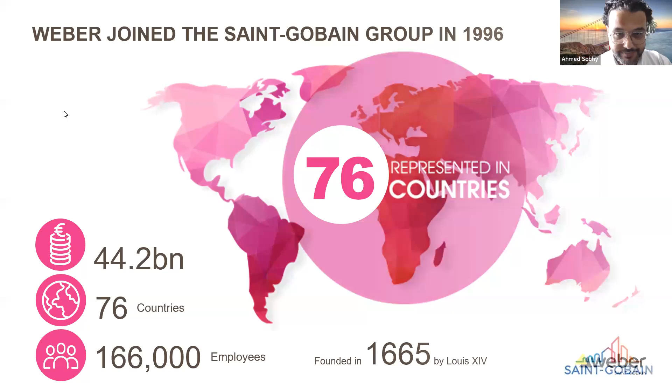I'm thinking that also Saint-Gobain operates in South Africa, but I'm not quite sure. Our core range is specific to the UK and Ireland market. My apologies, this presentation is tailored towards the market in the UK and Ireland. Obviously, the technology, the information, the knowledge is quite common, so it can be transferred from here to South Africa, definitely, but the market information is quite targeted towards the UK.

We serve the market here in the UK and Ireland through 5 main pillars that you see in front of you. Our biggest pillar at the minute, our core range of products, is external wall insulation and renders, which obviously forms a huge part of our business. We also have a flooring range, so obviously talking about your screeds, your self-leveling or self-smoothing compounds. We also have a tile fixing range, and lastly, my part of the business is the technical mortars.

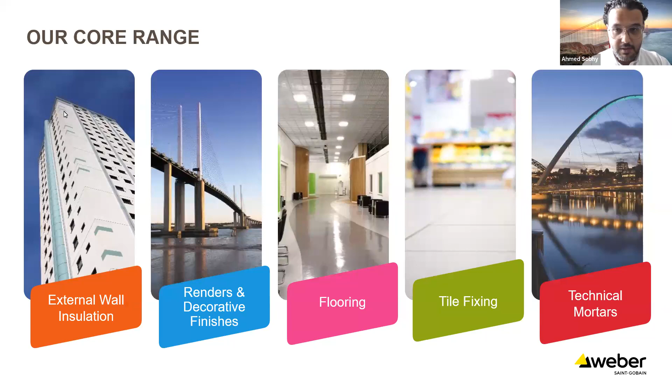Again, quite relevant to the people who have relevance in the UK market or who operate in the UK market. We've got 3 plants across the UK and Ireland. Our head office and main plant is based in Flitwick, Bedfordshire. We've got another plant in Telford and the 3rd plant in Northern Ireland in Ballyclare. We try as much as we can to source our material locally.

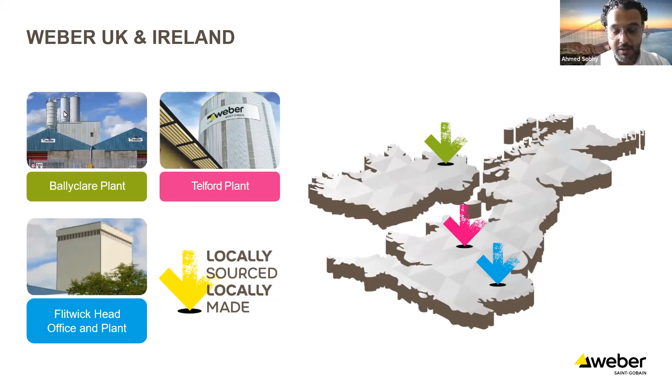As a part of Saint-Gobain, we've obviously got sustainability at heart of any business that we do, and we've got our net zero targets. With these 3 locations centrally located within the UK and Ireland, we have better control on our supply chain, which forms a huge contribution into the carbon emissions that we make. Also, from a supply chain perspective, we try as much as we can to locally source our raw material and our products in order to minimize the carbon emissions related to raw materials and production.

When we talk about the market and the technical mortar market, we use the terms infrastructure and technical mortars in a synonymous way, because at Weber in the UK we highly focus on the infrastructure sector of construction, and we serve this market through 4 main pillars of product portfolios.

The first of them being concrete repair, obviously a huge range of products that has a dedicated CPD towards it on its own. But as you can see from the picture here, a big part of it is the spray concrete with its massive and different applications, whether for slope stabilization, impressed current systems, or also repairing big cracks.

We also specialize in precision grouting. A big range of our products is targeted towards precision grouting, whether that is in an infrastructure context or a bridge context in terms of bridge bearings and plinths, but also from an industrial context when we're talking about machine base plates.

Thirdly, highway mortars forms a big part of our business as well. So we're talking about patch repairs, obviously for different thicknesses and different bay areas, quite fast-setting materials that serve the highways. Also, the bedding mortars that serve the furniture of the highways.

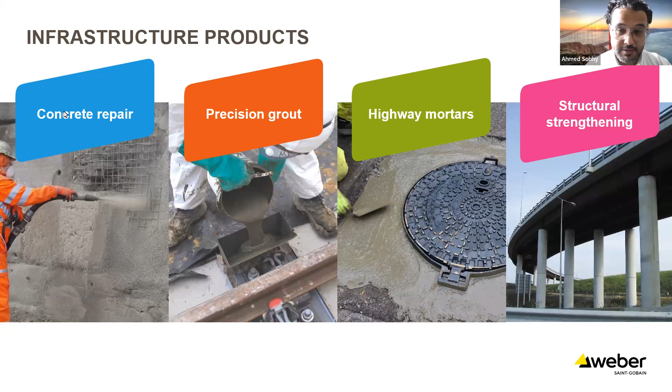And lastly, our topic for the day and a huge area of personal interest of mine is the structural strengthening using fiber reinforced polymers. Moving on to the introduction about the epoxy resins and the different fiber types. As we talk about, for instance, reinforced concrete, we're talking about a composite section where concrete and steel come together for obvious reasons that we all know about.

In a similar way, when we talk about fiber reinforced polymer, we're talking about a composite material that is made of a polymer matrix in addition to fibers. The fibers at the minute can be a myriad of materials. Obviously, glass, carbon, and Aramid or Kevlar as they call it, are quite common materials. But as we explore more, as we research more, and as we focus more on sustainability, a lot of material comes to the front, one of which is basalt, which is a material that is highly researched at the minute.

Yeah, thank you. Thank you.

As we address sustainability issues more and more, a lot of material, a lot of fiber types come to the front, and lastly basalt, which is obviously a material that is currently being researched and studied for use as fiber in structural strengthening.

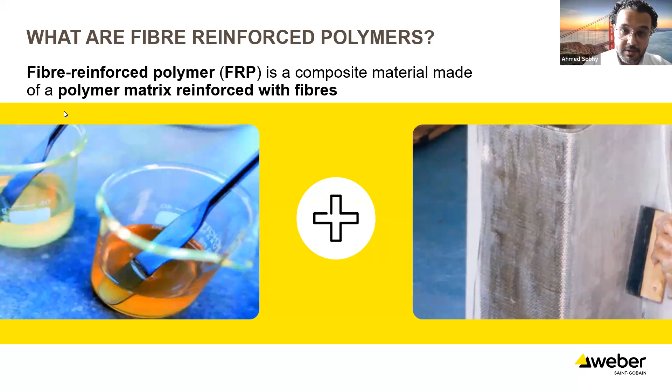We're quite aware that epoxy resins, or epoxy in general, is a petroleum derivative, and as a company and as an industry, we should be very much aware about the carbon emissions and the downfalls of using petroleum derivatives in fiber reinforced polymers or construction in general. We're very much aware about this.

When we're talking about a laminate or a finished product of fiber reinforced polymer, we're talking about a resin to fiber ratio of about 30% resin to 60-70% fiber. With that low proportion of resin within the plate or finished laminate, it has the highest contribution of carbon emissions when we talk about life cycle analysis over the life cycle of the product.

This 30% of resin contributes about 80% of the carbon emissions of that product over its life. So obviously it's a huge contribution when we're talking about carbon emissions, and we're quite aware about this as a business, and we're always investing into finding alternatives to epoxy.

But I think you guys would agree with me that adopting new technologies within the construction industry is not the easiest. There are lots of obstacles and hurdles to go through in order for this to find its route to market. But the most important point is that we're aware of this, and we're doing our best to change that moving forward.

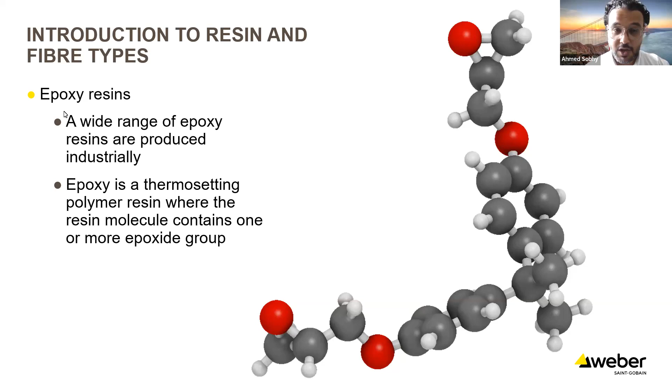When we're talking about the resin, fiber reinforced polymers as a material in general are not exclusive to the construction industry. It has been present before the construction industry and has been used in several other industries, and the main two reasons it's been used in different industries are, number one, it's lightweight, and number two, its ability to take a massive amount of load.

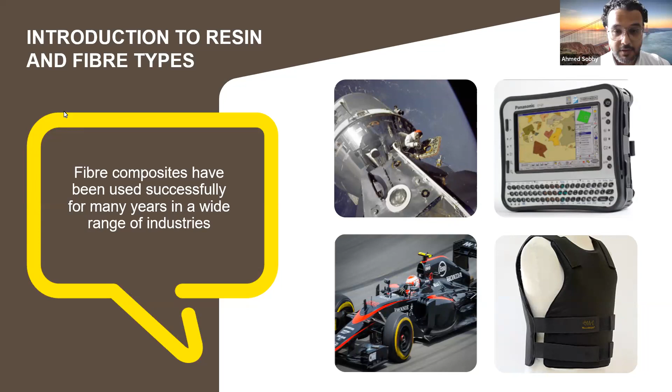As you can see from the pictures here, it has been used in the manufacture of spaceships and space shuttles, also in racing cars, but also from an army and military point of view, it has been used heavily, especially Kevlar, to produce bulletproof vests.

Also strengthening the point of the resin properties, and why it is of huge importance that we give significant importance to what material, what resin type we actually specify. The reason why this is of importance is that when we're talking about fiber reinforced polymers used for structural strengthening generally, we're talking about loads and structural elements being transferred to the fibers through the resin.

So obviously we're talking about a load-bearing element that needs to have minimum viable mechanical properties in order for it to transfer the loads from the structural element to the fibers.

That's number one. Number two, when we talk about the most common means of failure, especially right after the application of fiber reinforced polymers, it's usually due to delamination. Obviously, delamination could be due to several reasons.

One of them is poor application of the material, but also from research and from various experiences, poor mechanical properties of resins that have been used could play a major factor in delamination of fiber reinforced polymers after application. This is why it's very important for us to give huge significance to the resin type and the properties of the resin that we produce.

The resin that you can see in front of you is in full accordance with part 4 of BS EN 1504, which is related to structural bonding. Obviously, BS EN 1504 is a harmonized standard.

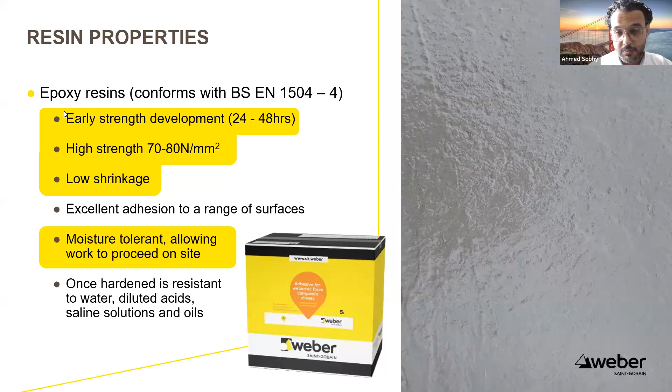We're talking about the moisture content within the concrete, but in a country like the UK, and I'm supposing tropical weather in South Africa as well, if we've got dampness on the surface of the concrete, this is absolutely fine also to apply Weber structural adhesive on top of it, because it's a moisture tolerant material.

When we compare that from a general perspective with cement-based concretes, cement, as we all know, needs about 28 days to gain strength, unless certain special admixtures have been used. We're talking about lower strength gains, around 30 to 60 megapascals over the period of 28 days, and the need, obviously, for formwork, which goes hand in hand with using cement-based concretes.

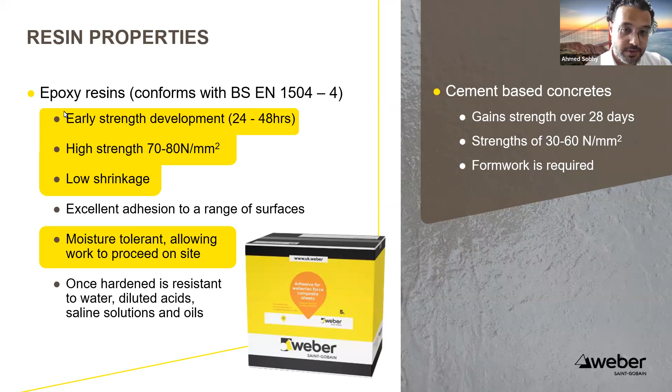Moving on to the different fiber types within our range: we've got the glass fiber that comes in sheets, the carbon fiber that comes in both forms as plates and sheets, and lastly we have the Aramid fiber sheets.

This picture you see here for the Aramid fiber sheets was applied on the M6. This is a project that happened on the M6 here in the UK. If it's irrelevant to you guys, my apologies, but you'll get the gist of it. Literally, a military tank was passing by, and this wasn't the first incident.

This column on the road on the M6 was actually quite susceptible to lots of impact from cars. The reason that caused the application of the Aramid fiber on this column was a military tank that hit the column, causing severe deterioration. In this application, it wasn't structural strengthening, rather it was concrete protection and impact resistance of the concrete column.

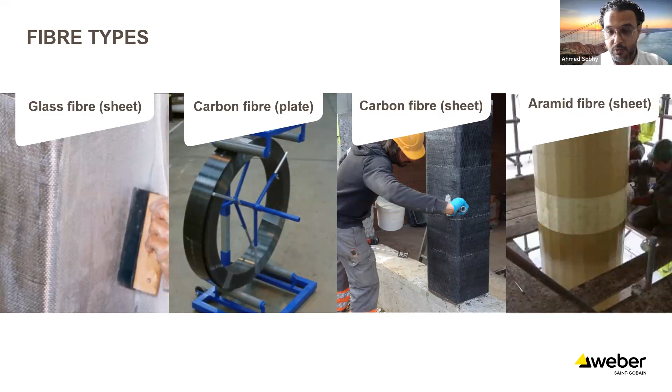So this is the range that we have at the minute. Obviously, the specification of which material can be used in which application depends on many criteria, and we'll try to summarize this in the next slides.

Talking about the different mechanical properties, we'll single out a few of the product portfolio you've seen in the previous slide. Starting with the carbon fiber, the picture here shows column strengthening and axial reinforcement for a column to increase its load capacity. For mechanical properties, we're talking about a sheet weight of around 200 to 400 grams per square meter, a very low weight compared to our regular day-to-day construction materials.

We're talking about a tensile strength of about 2,600 to 4,400 megapascals. It's important to note that these values for tensile strength are basically for the fibers, not for the finished product. So when the fiber is combined with the resin, these numbers actually reduce dramatically.

Even when we consider the tensile strength of the finished product, the laminate or the wrapping, we don't take the whole amount of the tensile strength in our design and consideration. We take only a proportion of that, and the most governing criteria will be the strains rather than the stresses, because this material plays a part within an ecosystem of concrete, and the concrete within the system is the weakest component. So we can't design according to 1,000 or 1,500 megapascals; we only take a portion of it. Otherwise, the concrete will completely crush, or the system we design will delaminate.

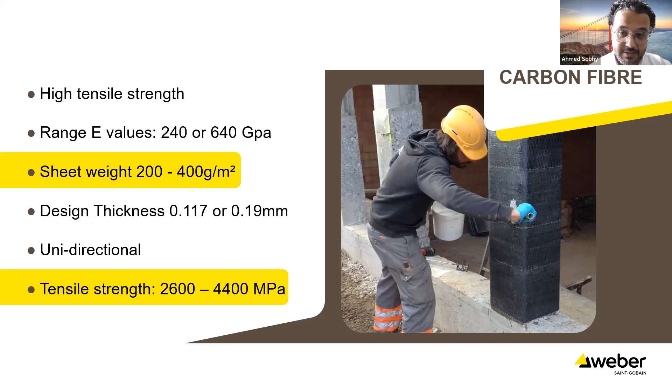Moving on to the properties of the glass fiber, not really dissimilar from the carbon fiber that we've seen previously. We're talking about a sheet weight of 350 grams per square meter, and a tensile strength of 2,850 megapascals.

Before we move on, it's important to note that when we're talking about the fiber reinforced polymer family in general, we're not talking about the most ductile material ever, and this will be evident when we compare the stress-strain curve and the behavior of the material under loads. So we're talking about quite a rigid material, so we don't expect a huge amount of elongation. This is one of the main reasons why the design is actually based on strains rather than stresses. For this specific material, the elongation at rupture is about 2.88%.

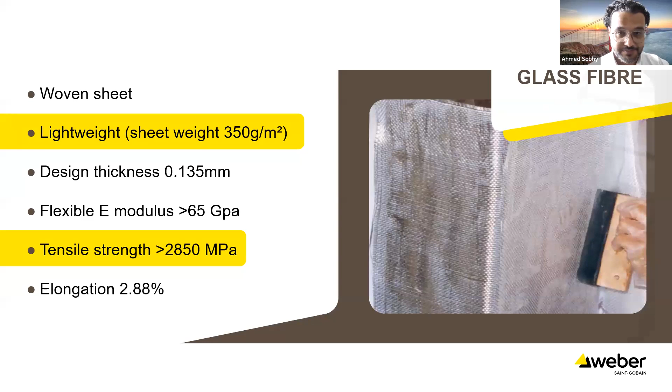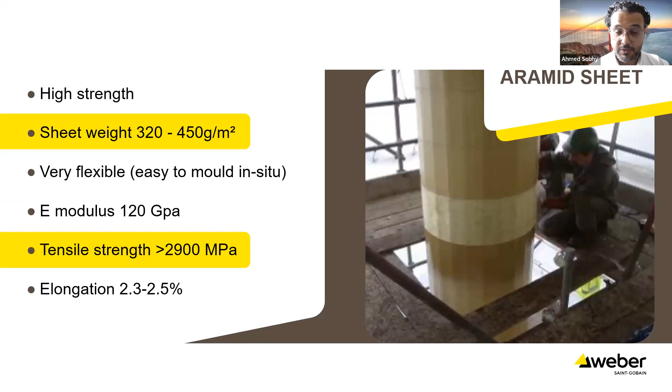Moving on lastly to the Aramid, again not too dissimilar from the previous families. The sheet weight is about 320 to 450 grams per square meter, tensile strength is 2,900 megapascals, and elongation is about 2.3 to 2.5% at rupture.

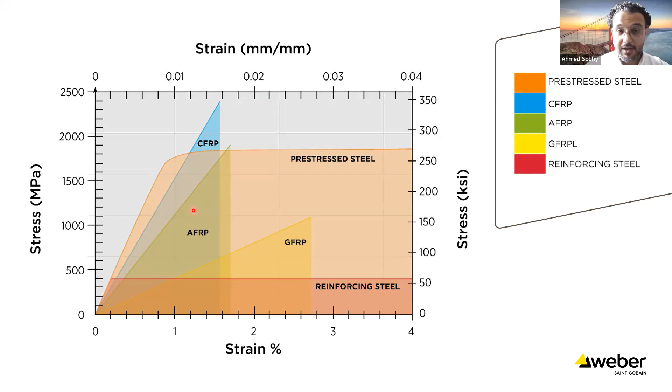A very important point to note is that because fiber reinforced polymers in general are governed by elastic performance, they're quite handy when designing for things like seismic loading, because when the load hits, and as soon as it's released, the fiber reinforced polymers go back to their original form, since they're governed by elastic performance. This is why the majority of applications we use fiber reinforced polymers for are to take live load actions, because they take a huge amount of load, and when the load is released, the fibers go back to their original form without any deformation.

So a bit of a selection criteria to summarize what we've talked about before. If the governing criteria is to achieve stiffness, it's also important to note that one of the limitations of using fiber reinforced polymers in structural strengthening is that it doesn't add a lot of stiffness, or doesn't help defy deflection. This is one of the limitations. As I said in the beginning, fiber reinforced polymer is not a one-stop solution for everything. It's got its own limitations, and one of them is deflection.

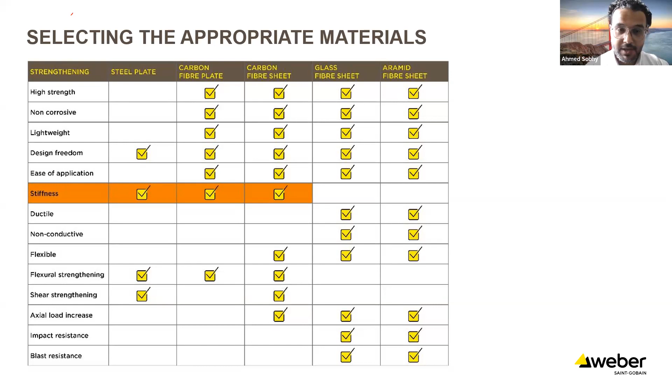The reason is the very low thickness of the material. When we're talking about plates, for instance, we're talking about 0.1 millimeters, or 0.3, 0.4 millimeters. So the thickness itself is very, very little, so it doesn't add much stiffness to the structural elements. When we want to increase the stiffness a lot, for instance to control deflections, we usually specify steel plates, installed and fixed using structural adhesive.

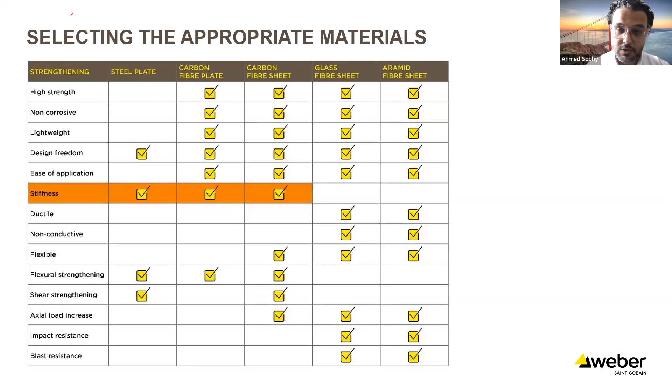When the objective is to increase ductility, we usually specify glass fiber sheets or Aramid fiber sheets. As discussed earlier in the application on the M6, when the objective is to increase impact resistance or blast resistance, the majority of applications use either Aramid, which is heavily used in these applications, or glass fiber sheets.

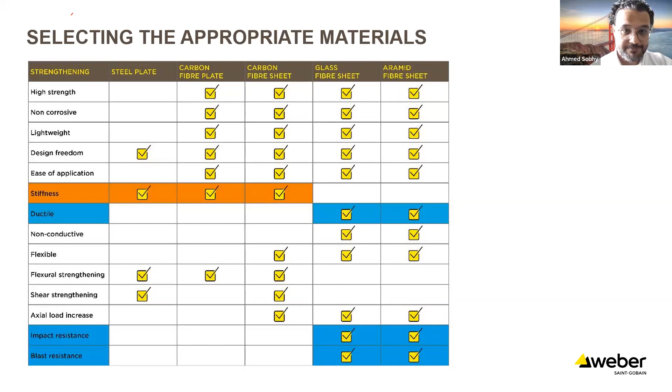Moving on to the most important point in my view: why do we strengthen, and why do we use FRP? In this part of the presentation, we're also going to talk about some of the feasibility studies and the different options we go through whenever we come up against a structural strengthening project.

So why do we strengthen? Obviously, there are a myriad of reasons why we strengthen. The most important, the most common, in my view, is inadequate design. We've got involved in numerous projects where inadequate design has been in place, and the designer, to make up for the problems that happened during the design, opts for structural strengthening using fiber reinforced polymers.

However, as we talk a lot about sustainability, and as it comes to the front more and more, we're talking about repurposing our structures and reusing them rather than demolition and building again. So one of the main applications where we use structural strengthening is also repurposing or change in use. Let's say a multi-story car park that is being repurposed into an office building, for which we need to increase the structural capacity of certain members.

This is when we use fiber reinforced polymers for structural strengthening in general, not just fiber reinforced polymers. We've also got involved in many applications where damage risk has been there, like the project we've talked about on the M6, and also the risk of explosion or impact damage. In these instances, it will be more of a protection to the structural element rather than structural strengthening.

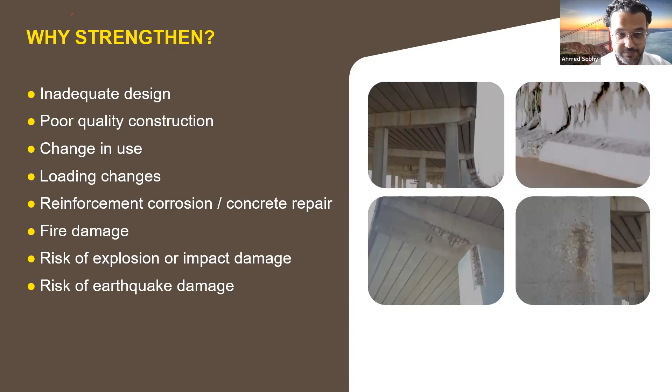Moving on to the different options that we have when we're up against any structural strengthening project, as a project manager, as a designer. The majority of the options that you will actually study or think about are here. We try to consider them as much as we can to give you an image of the pros and cons of using FRP for structural strengthening.

So when we're up against a project, we usually go through three main routes. It's either casting new reinforced concrete sections, or as we call it, jacketing or member enlargement. We also have the option of steel plate bonding. And lastly, we've got FRP strengthening.

If we start with the first option, obviously talking about sustainability, we're trying to drive the point that we need to cast less concrete because of the carbon emissions associated with casting new concrete. However, if we put sustainability aside, casting new concrete comes with many disadvantages. It's a very highly labor-intensive process. It needs formwork and props, and there are loading restrictions during curing. So it takes a huge amount of time and preparation, and is quite a labor-intensive process to establish.

Moving forward to the second option, steel plate bonding, which has been used for structural strengthening for a very long time. This is nothing against using steel plates - it is a great application, a great solution when appropriate. Also, one of the solutions against deflection is using steel plate. We get involved with it a lot, but it's to tell you there are other solutions rather than steel plate, and also to open the door to the disadvantages of using steel plates, as we can see here.

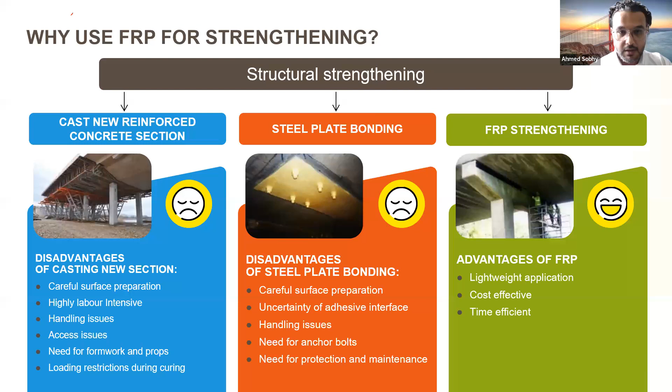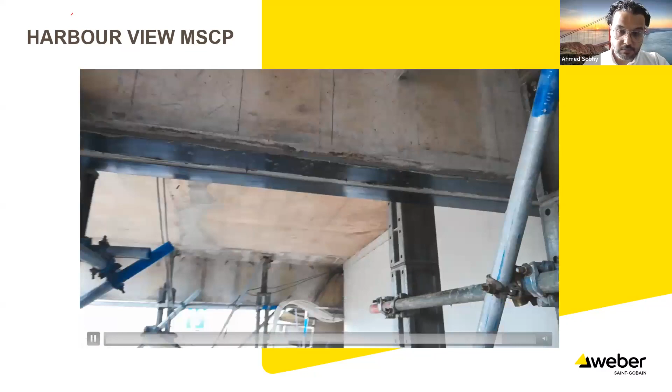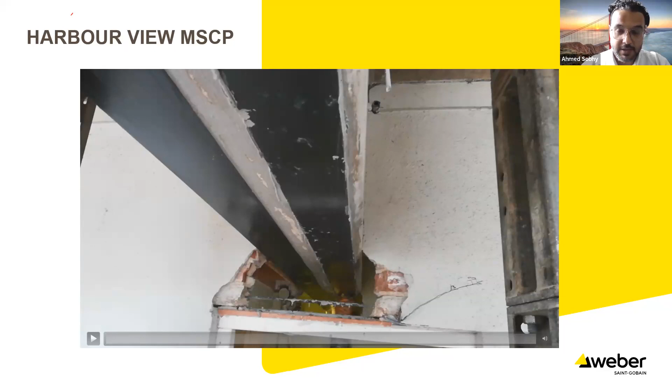Quite an interesting application. I think it was quite evident that because of the very light weight of the material, in an overhead application like this, it was very convenient to hold the material overhead and apply it and also bend it, which was quite maneuverable. Absolutely really convenient in this kind of application. If we had considered using steel plates, for instance, in this application, it would have been a lot harder than the picture that we have seen here in the video.

So to summarize, using fiber reinforced polymers and comparing it to using steel plates, a very important point is obviously the self-weight. The fiber reinforced polymers are quite low in self-weight as opposed to steel, which is high. The application here is by hand basically, as opposed to using lifting gear and machinery for applying steel plates.

And in my point of view, something that adds to the whole costing of the project is the corrosion and the maintenance. When we're talking about fiber reinforced polymers, it's a corrosion-free material. Steel plates, because of the innate nature of the steel, definitely require protection.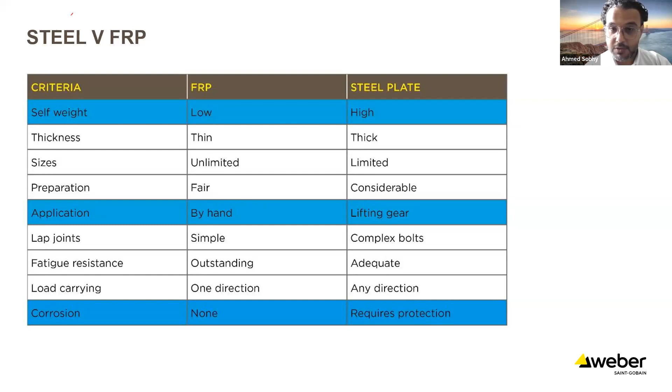Also strengthening the point and the different options that we discussed earlier when we're up against any structural strengthening project, we also made a case study to compare the different solutions that we have. In the case study here, the objective was to increase the live loading capacity of a simply supported beam by about 35%. And again, we went through the three main options that we discussed before: bonded steel plate, jacketing or member enlargement, and lastly fiber reinforced polymer sheets.

For bonded steel plate, the design opted for a 6 millimeter bolted plate, which added about 110 kilograms of dead load, and it needed to be placed and lifted by trucks. For member enlargement, the design opted for adding a couple of 16 millimeter rebars, and that needed a concrete cover of around 110 millimeters. This added about a ton of dead load, and it needed to be formed and cured.

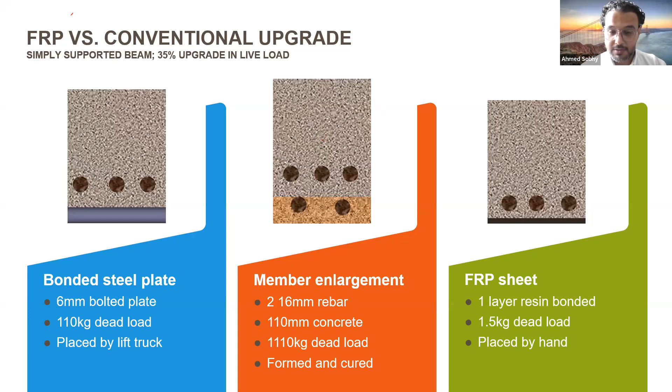Using the fiber reinforced polymer sheet was literally one layer of resin bonded fiber reinforced polymer, 1.5 kilograms of dead load, and it was placed by hand. So obviously it was very appropriate to use fiber reinforced polymers in this instance rather than the two other options.

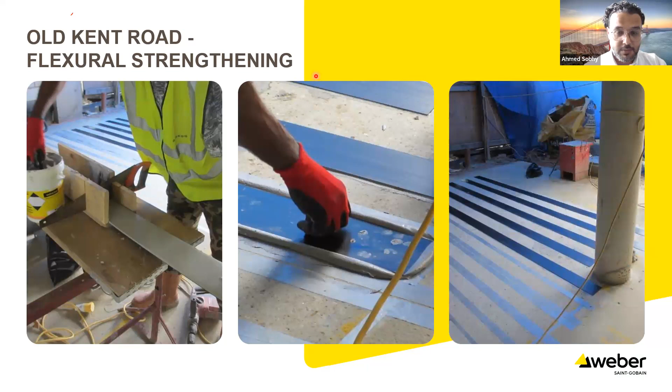Another of the case studies that we've done is a project in Old Kent Road, and the objective of the project here was flexural strengthening. As you can see in the first picture on the left, a site-developed tool, if you will, to control the thickness of the structural adhesive on the back of the carbon fiber plate. As you can see, it's a wooden box. This is something that the contractor came up with on site.

It's a wooden box completely filled with structural adhesive, and they start with the plate from the top of the box, and as they pull it, they use this saw here to control the thickness of the structural adhesive. And as they pull the carbon fiber plate from the other side, you get a uniform layer of the structural adhesive on top of the plate, which is quite the objective.

Another layer of the structural adhesive is laid on the soffit, and you apply them wet on wet, and you use a roller to pass on and press on the plate to release all the air entrapment and remove all the voids. Then all the excess material is removed, and this is what you end up with: a completely neat application of flexural strengthening.

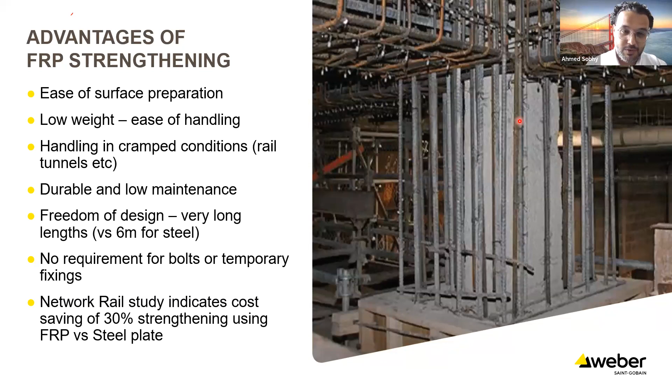Another point that I would like to note here: it's actually mentioned in the Concrete Society Technical Report 55 that there was a study issued by Network Rail that indicated a cost saving of about 30% when using fiber reinforced polymers for structural strengthening as opposed to steel plates. So don't take it from me as a material manufacturer, take it from Network Rail, who are completely unbiased, I think.

Also, as we have noted several times, there are various disadvantages of using fiber reinforced polymers, and the first point here is obviously the perceived cost. And why do I always say it's a perceived cost? Because when we are dealing with a contractor, and the majority of us are coming from a contracting background as well, we always weigh things by how much they cost, and this is why it's a perceived cost.

However, now the new technology and the new knowledge tell us to weigh the whole life costing of the project, and when we include the whole life costing of the project, using FRP for structural strengthening is not actually expensive at all when you include the costs of maintenance and inspection across the life of the project.

There is definitely a lack of knowledge across composite strengthening, because it's a fairly new technology. It's a fairly new application of this material for structural strengthening, and this is quite understandable. And something that adds to that is, unfortunately, as we speak now, using fiber reinforced polymer for structural strengthening is not covered by any British or international standards.

This should be addressed in the new version of the Eurocode. I'm thinking that it has been addressed, but I haven't read it, so I don't know if it has been addressed or not, to be completely honest with you. But as it stands now, it's not really covered by British or international standards. And obviously, there's a huge need for skilled operatives in order for the application to be successful.

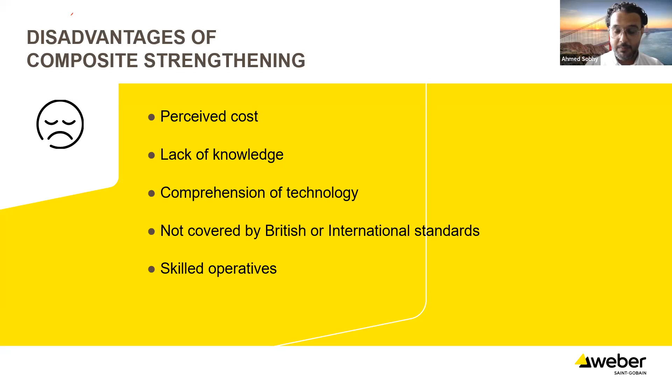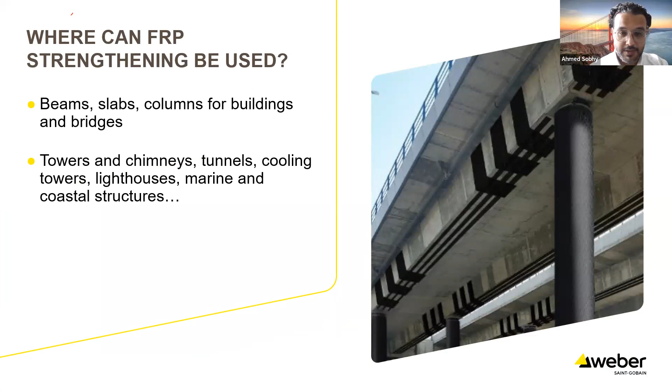Moving on to a very important point, in my opinion: the comparison between external application of fiber reinforced polymers versus near surface mounted application. What you have seen in the previous slides is all related to external application of fiber reinforced polymers, whether for flexural capacity, shear resistance, or axial loads. What we're talking about here is the near surface mounted application. Why do we use it?

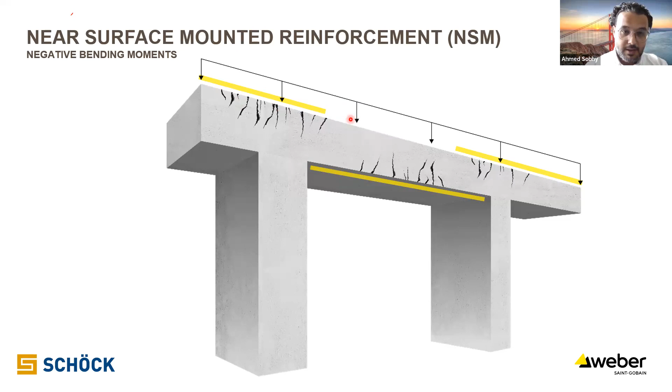But when it gets to the top part of the slab here, if it is a multi-story car park, it's going to be exposed to wear and tear, to pedestrians as well as cars. So you can't really be comfortable specifying and applying a fiber reinforced polymer system and leaving it completely exposed to vandalism, basically. And this is why, in similar instances, we opt for a solution called near

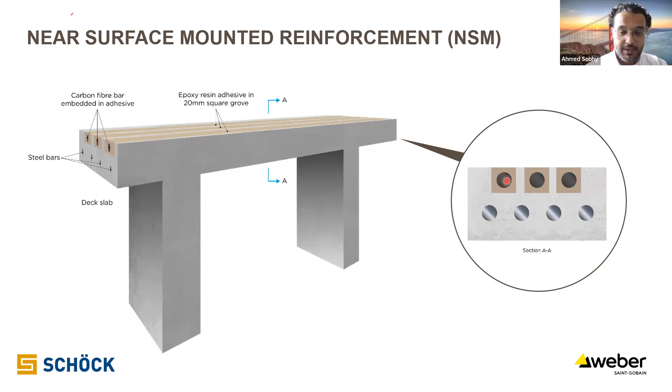surface mounted application. The solution is basically mounting the fiber reinforced polymer into the concrete cover area. So we use grooves of about 20 millimeters, and in this application we completely encapsulate the carbon fiber rods or the glass fiber rods with structural adhesive material.

In this application, because as you have seen earlier, we don't have rods in our range of products, we have collaborated with a company called Schöck. I'm assuming that this name is actually quite familiar to a lot of you, because Schöck is a German company that is specialized in the manufacture of glass fiber reinforced polymer rods.

The rods that you see in front of you here, obviously they are ribbed rods, which play an important part in increasing the bonding and decreasing the slippage of the rods from the structural adhesive. And they can be provided in different thicknesses. We're talking about 8 to 10 millimeters of thickness, dependent on the design.

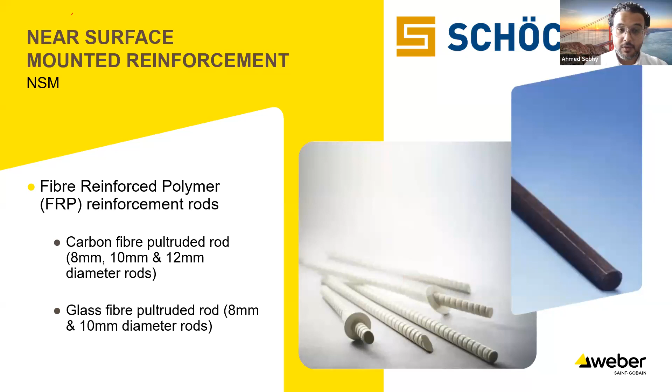This is one of the applications where near surface mounted structural strengthening has been used, and as you can see, it's literally the same application that we have discussed earlier. It's a multi-story car park, the parts where the most negative bending moment is actually taking place. It can't be left exposed to cars, vandalism, wear and tear. So we opt for mounting the structural strengthening system within the concrete cover.

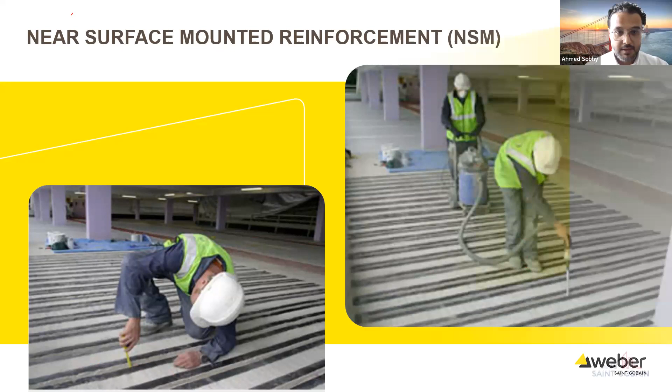And as you can see, the chap here is actually cleaning the grooves and blowing air into them in order for it to be prepared to receive the encapsulating layer of structural strengthening, as well as the fiber reinforced polymer rods. And here we're going to discuss a few of the applications.

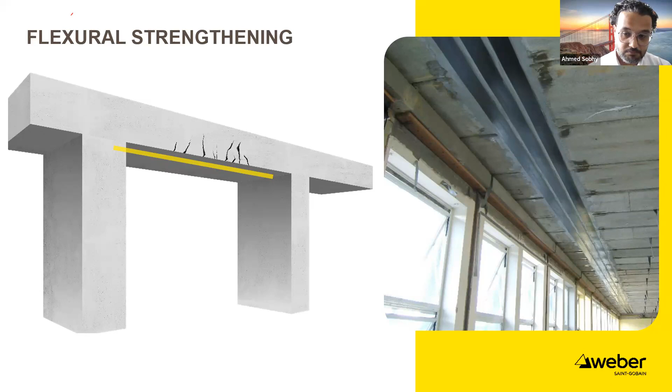As we have discussed and as we have seen before, fiber reinforced polymers can be used for flexural strengthening. They can be used for flexural strengthening on normal concrete elements, pre-stressed concrete elements, post-tensioned concrete elements, as well as masonry and timber structures. I don't know about South Africa, but timber and masonry are quite common building materials to be used here in the UK. So this material can be used for flexural strengthening.

We have discussed before, when talking about stresses and strains, that the most governing criteria when we're designing is going to be the strain rather than the stresses, because we're working in an ecosystem of structural concrete, where the concrete is the weakest element, and we need to adapt to that. So we only take a portion of the strains available in the fiber reinforced polymers, which is the effective strain that we can see here.

And according to the American Concrete Institute, this is how we can actually obtain the effective strain. The only reason I'm including this equation here is to tell you also that when we're considering flexural strengthening, there is a soft point to the amount of layers of fiber reinforced plates that we can add, because after this soft point, we're going to be spending a lot of money on the plates, but only gaining marginal increased capacity in the structural element.

And how did we come to that conclusion? As we can see from the equation here, this is to calculate the debonding strain or the effective strain. As we increase the modulus of elasticity, as we add more layers, we decrease the effective strain or the debonding strain. So as we add more layers, we get literally marginal increased capacity. And this is why it's important to note that adding plates over plates over plates is not the answer to increasing the structural capacity in flexural strengthening.

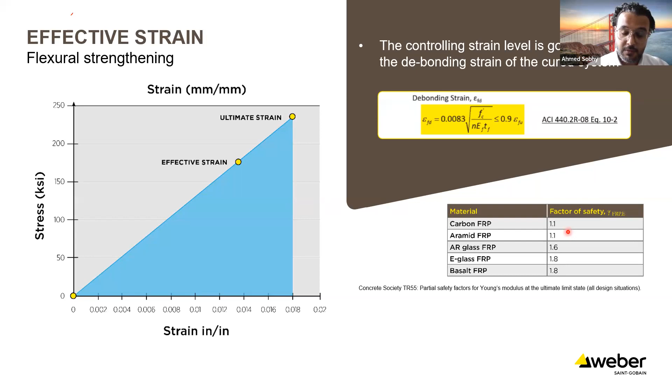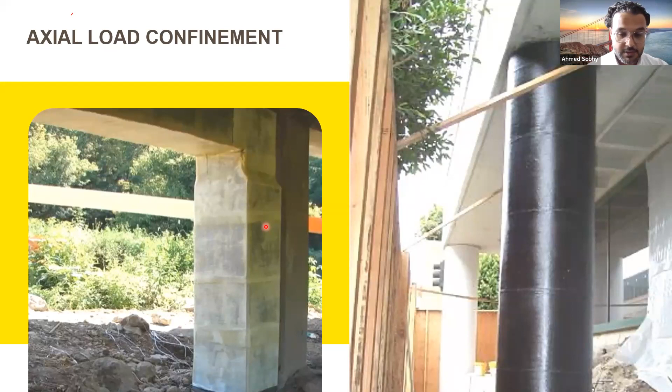In this application, it was used for axial load confinement. What's interesting is there are two columns with a very minimal space between them. Because of the very small thickness of the material, the design opted for structural strengthening of one column rather than two, and it was able to be extended between the minimum thickness between the two columns. If another system was specified, it would have definitely included both columns together, because of the very minimum thickness between them.

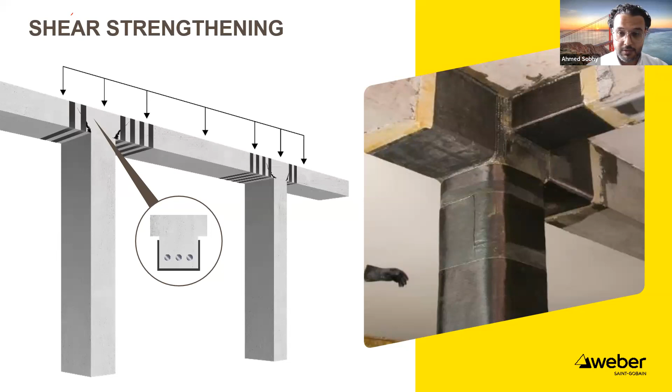One of the most interesting applications we come across is the overturning force. For instance, imagine this is a diaphragm wall, and we want to increase its structural capacity. This is one of the instances where we need to be very careful of placing steel in close proximity to carbon fibers. Here, the designer opted for using carbon fiber and a steel angle at the bottom of the wall to increase its capacity.

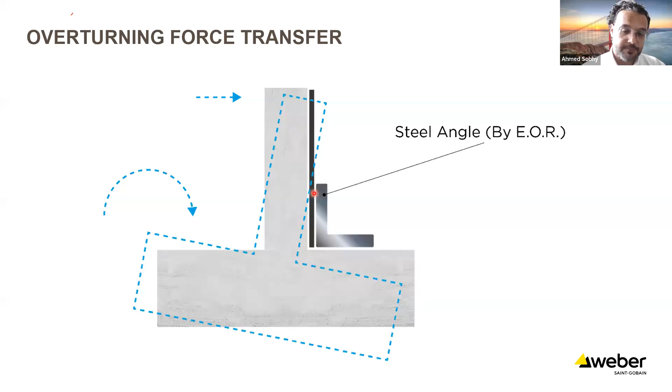Putting carbon in close proximity to steel will actually encourage the steel to create a corrosion cell, and this is why we always recommend using a separation layer, either of structural adhesive, an epoxy layer, or glass fiber reinforced polymer, to come in between.

Fire consideration is of high importance after the unfortunate incident - I don't know if you guys have heard about it - that happened in London at Grenfell Tower. Fire consideration has been baked into an innate nature that we consider in literally everything we produce, starting from cement, concrete repairs, and obviously fiber reinforced polymers.

The main reason we consider fire with fiber reinforced polymers is because of the resin, the epoxy. As we said before, it's a petroleum derivative, and it has quite a low glass transition point, so it starts losing its strength at very low temperatures. This is why, when fiber reinforced polymers are used in a building that falls under fire regulations, it's very important to actually protect them from fire.

In the majority of applications we've come through, there is no fiber reinforced polymer system designed to carry loads in fire. In the design, it's actually considered that in case of fire, the fiber reinforced polymer will not be in action. This is why it's very important to check the serviceability loads, and very important for the building's structure to carry its own service loads on its own in case the FRP system fails.

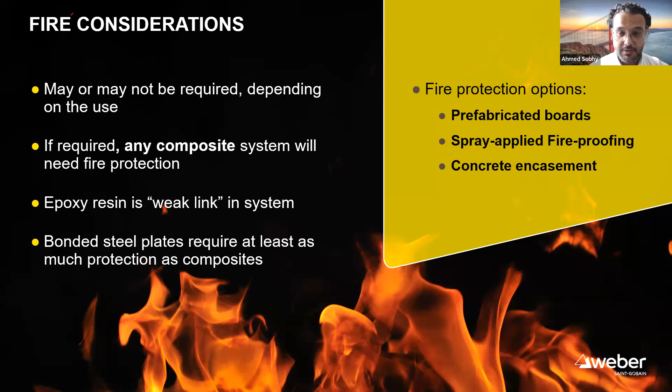The most important point to note here is that if we are operating in a building where fire regulations are in place, it's very important that we protect the structural strengthening system using any of the fire protection systems.

This is a case study we did in High Wycombe, a university where Saint-Gobain efforts have come together. As you can see, this is carbon fiber plates applied for flexural strengthening, and they have been covered by British Gypsum fire-rated boards. This has given the fiber reinforced polymer system fire protection for 2 hours. This system has been completely designed by Saint-Gobain - as we said before, British Gypsum is part of Saint-Gobain, and we applied this system under one umbrella.

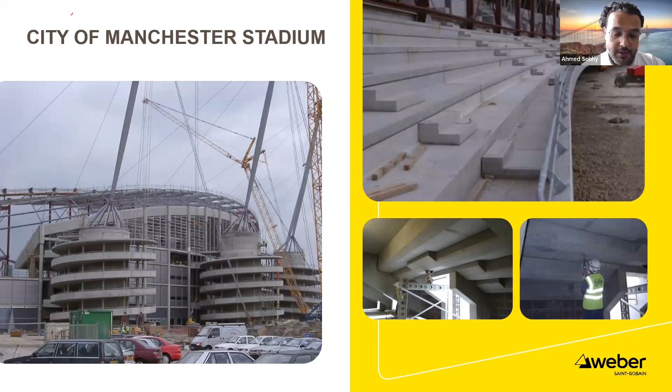Very quickly, a few case studies for the football fans present. This is quite a known structure, the City of Manchester Stadium, where we applied carbon fiber reinforced polymers to increase the structural capacity of the terraced beams. This project was done years and years ago, and it's still in place now. You see the significance and criticality of the application of fiber reinforced polymer here - it was a problem solver because of the very small space where the people and contractor were operating. It was quite an adequate system to specify, and it's still in place until today.

This is another project that we have done on the M60 motorway. Our client there was National Highways, and fiber reinforced polymers was used for flexural strengthening. The most important point to take away is that there was a time saved of about 50% on the program after using fiber reinforced polymers, because the product is very low in weight and very maneuverable, so it can be used in a very easy way.

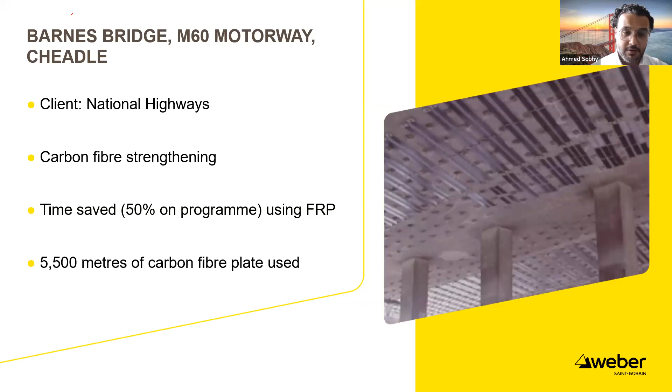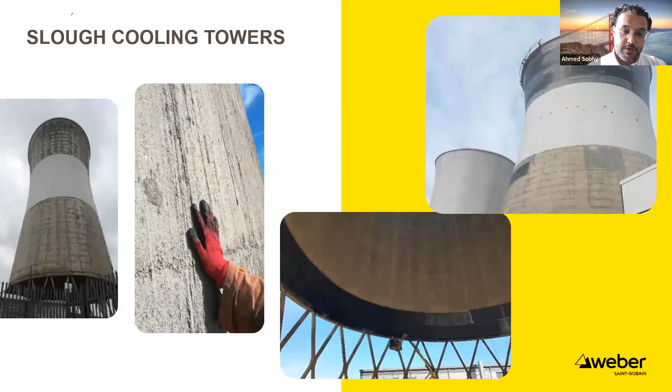This is a project that I personally got involved with. It's a Slough cooling tower, a gigantic project where carbon fiber reinforced polymer wraps were used to keep the integrity of the structure. The structure was fully wrapped from the outside, and from the inside of the cooling tower it was applied in strip actions, in a kind of collar situation.

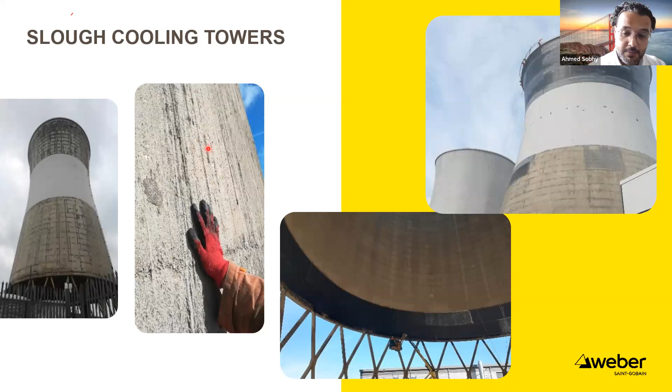So there's this wrap, then there's a space with no strengthening, and then another fiber reinforced polymer strip being applied. One important point to note is the existing condition of the concrete was very rough, and it wasn't possible to apply any structural strengthening system as is. So we advised the contractor to grind all the irregularities out and apply a smoothing or leveling compound, in order for the surface to be completely prepared and ready to receive the carbon fiber wrap.

Application guidelines and some important points to summarize what we've discussed earlier. As we said before, the success of any application relies heavily on two points in my view: surface preparation, and the quality of workmanship, both of which go a long way into the success of any fiber reinforced polymer project.

This is why it's very important for us to evaluate and understand the existing condition of the concrete - the existing compressive strength and the existing bond strength are very important for us to understand. One limitation of fiber reinforced polymers is that if the existing concrete is of poor quality - for instance, the compressive strength is less than 20 megapascals, or there are voids, deterioration, or corrosion existing in the concrete - we would never be able to specify fiber reinforced polymers. In this instance, we need to put the concrete right, evaluate and come up with a repair strategy, put the concrete right, and then we can talk about increasing the capacity or protecting the concrete using fiber reinforced polymers.

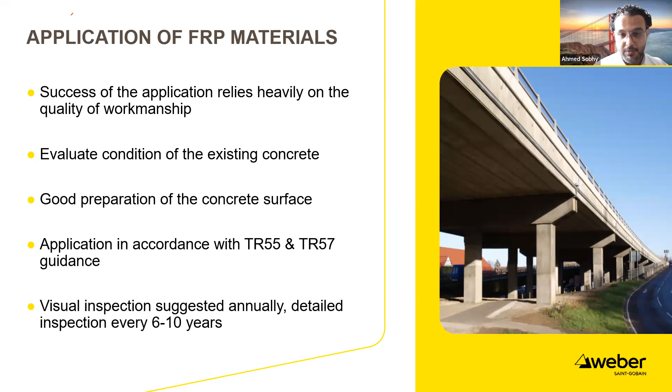As we've said before, fiber reinforced polymers is basically a maintenance-free system. Visual inspection is suggested annually, merely visual, with a detailed inspection suggested every 6 to 10 years. Again, this is not my recommendation - this is according to Technical Report Number 57, which we will discuss in a later slide. When we compare that 6 to 10 year period to other structural strengthening systems, for instance using steel plates or member enlargement, we're talking about a detailed inspection at least annually in order to assess the condition of the concrete and the steel plate. If we consider the whole costing of maintenance and inspection, fiber reinforced polymer is going to be the cheapest solution.